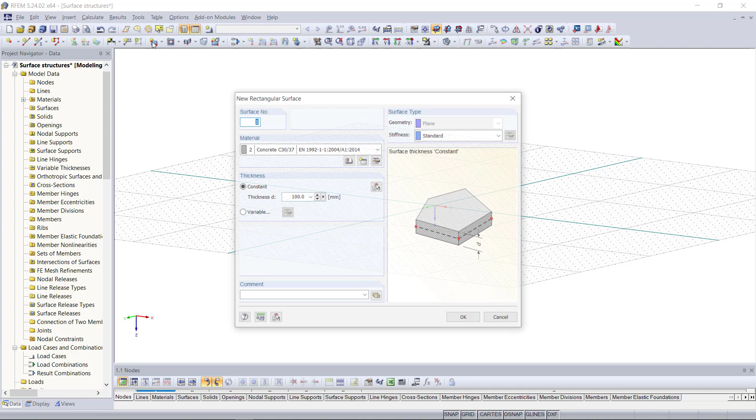For that, we can find in the toolbar a symbol called new rectangular surface. By clicking on it, a new dialog will appear where we can define the properties like material, the thickness, and the surface type. As material, we will choose, for instance, concrete C30/37 based on a European standard, and the thickness will be, let's say, 300 millimeters.

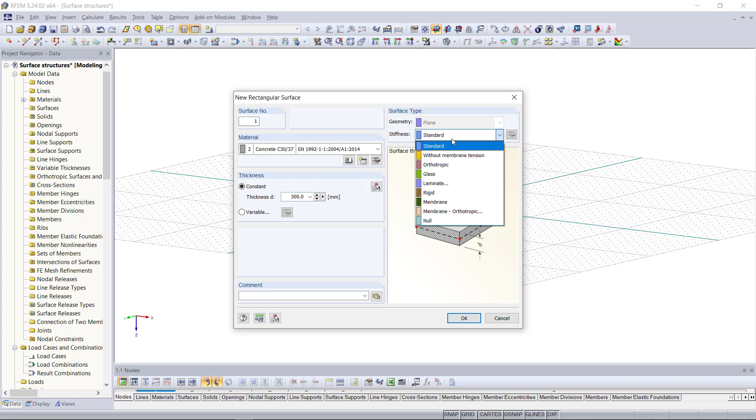And then under surface type, we can choose some additional options regarding the stiffness and with that structural behavior of the surface. We can choose, for instance, without membrane tension, or we can choose a rigid one. But for our example, we don't need that, so we will stay with the standard type.

With clicking OK, we can select 2 points in the graphical area to create the surface. Up here, we can change the view to the top view. This makes it just a little bit easier to snap those points. So the first node will be at 0 and 0 and the second one at 10 and 10.

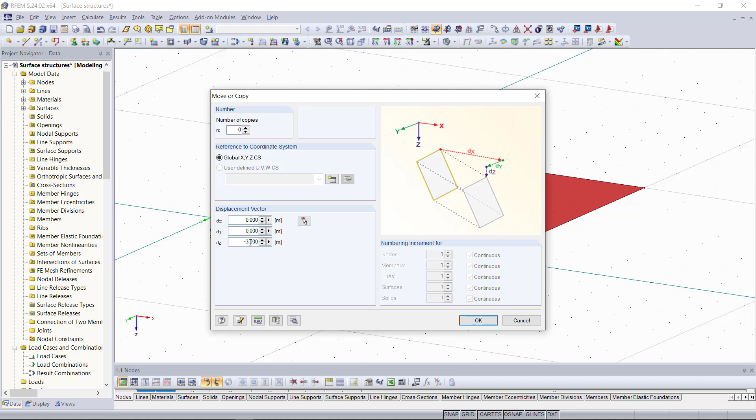Then we will move the surface with an offset of 3 meters along the z-axis. For that, we use again the copy and move command, which we can find in the toolbar, or we can also find that with right click on the surface. Since we don't want to copy this one, we can keep the number of copies as 0. And in order to move it, we just type in the z direction -3 and then click OK.

Now that we have our slab, we will create 4 more surfaces, which will be our walls. And for that, we click again on new rectangular surface. In the new dialog, we can keep the previous settings except the thickness. Our walls will have a thickness of 200 millimeters.

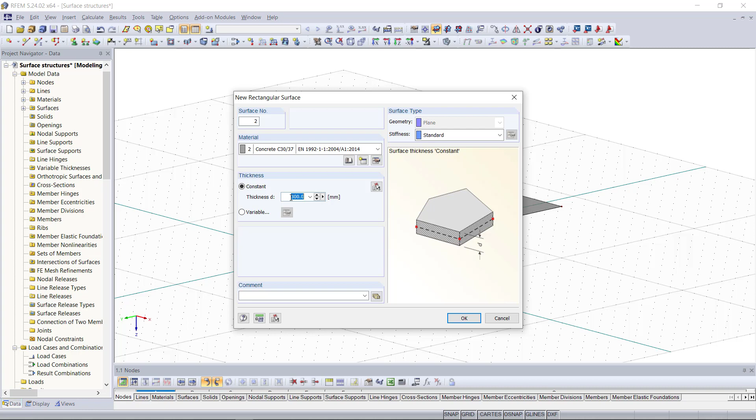And then we can graphically insert them along the edges of the slab. A great help during modeling these surfaces is if we change up here the plane, we can easily snap those points and create those surfaces.

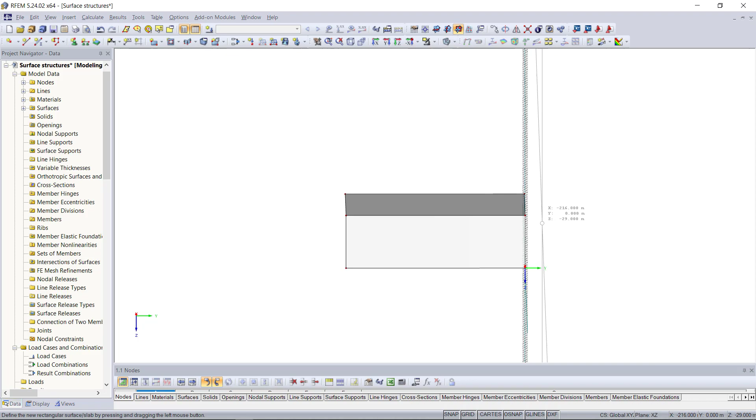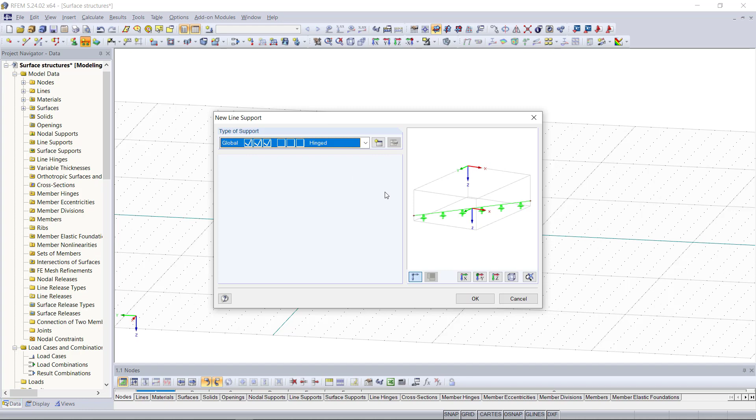Now that we have our structure, we need also some supports. And for surfaces like walls, in order to create the supports along their edges or along the bottom lines, we can find up here the symbol called line support. And we will choose hinged ones, and then with clicking OK, we can assign these very quickly to those lines.

You might notice that there is no thickness displayed for the surfaces that we've just created, although we've entered a thickness back in the surface dialog. So this is just a view setting. We can get it displayed if we go to the display menu and then choose rendering. Under model, here we can choose filled inclusive thickness. Just as a hint for you, and as we can see it now in the graphical area, the thickness is rendered on these surfaces.

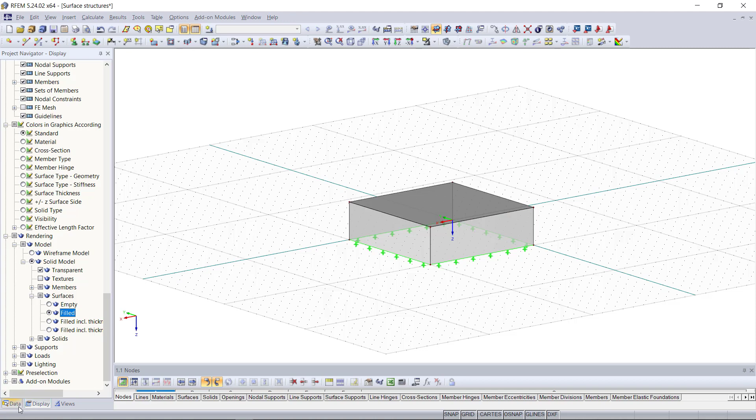So we are almost finished with our structure. Just for more stability, I'd like to create a column in the middle of the slab. For that, we will divide it into 4 identical surfaces so that we can get the middle node for the column. And then later, we can also apply a load on each of these surfaces within 4 different load cases.

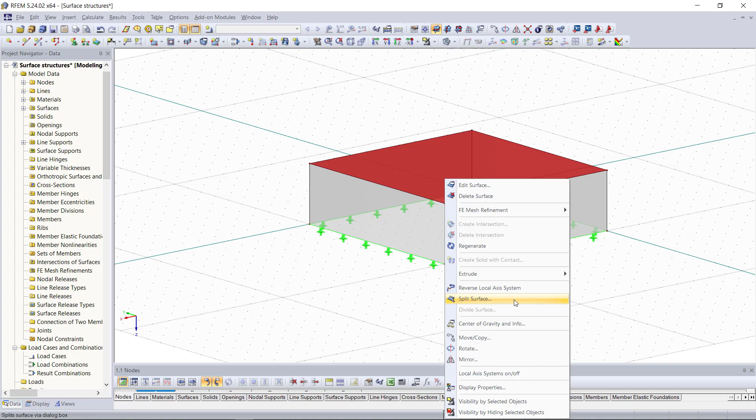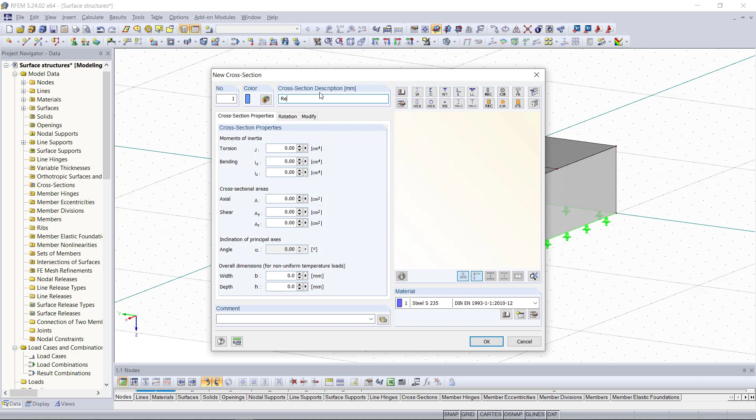And now we can create the column at this middle node of these surfaces. So we will select new single member up here, and then as cross section, we can enter a rectangle with a height and a width of 300 and concrete as material.

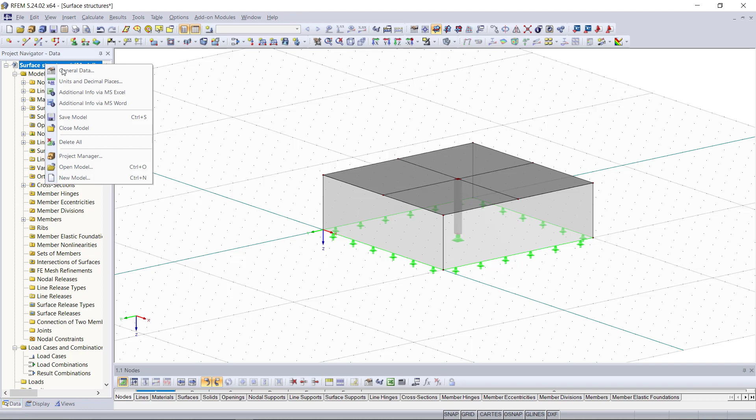And then we will add also a nodal support to this column. Now that we have our structure complete, we will move on to the load cases and loads. Before we get started with defining any load case, we will first go back to the general data. The dialog for that we can open up with right click and then select general data.

What I want to do here is to activate the option called create combinations automatically. So first we can determine the standard type, for example the European one, and the German national annex for it, and then we can activate this option here. This will allow us that the load combinations of the load cases that we will define later are getting generated automatically, since we have this time a couple of more load cases than usual. And with OK, we can close this dialog and start defining the load cases.

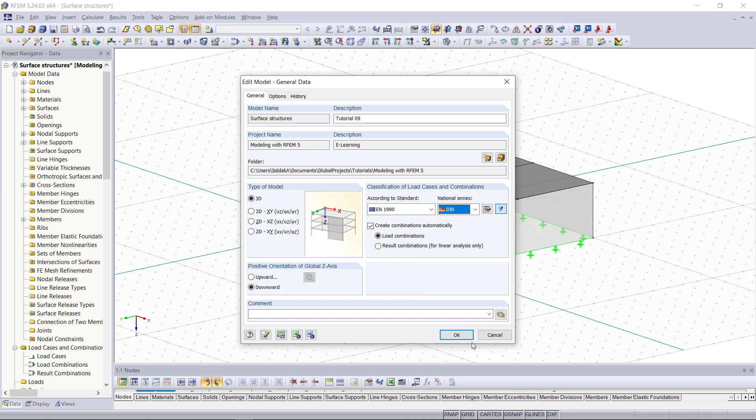So the first load case is, as usual, the self-weight, and then we will create 4 more load cases. Assuming an office building above our slab, we will choose this action category here, and let's say we call this one surface load 1. Then we can copy this one 3 more times and rename them to surface load 2, 3, and 4. And then we can assign a surface load for each load case with changing the surfaces.

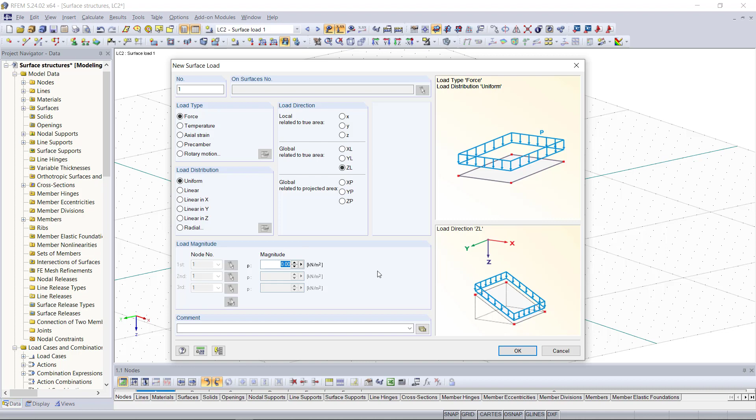So we will choose the right load case up here and then click on this button called new surface load. Similar to the dialog for a distributed load, we can keep load type as force. The direction will be global z direction. As a load parameter or magnitude, we will enter here 2.5. And then we can apply it to each surface.

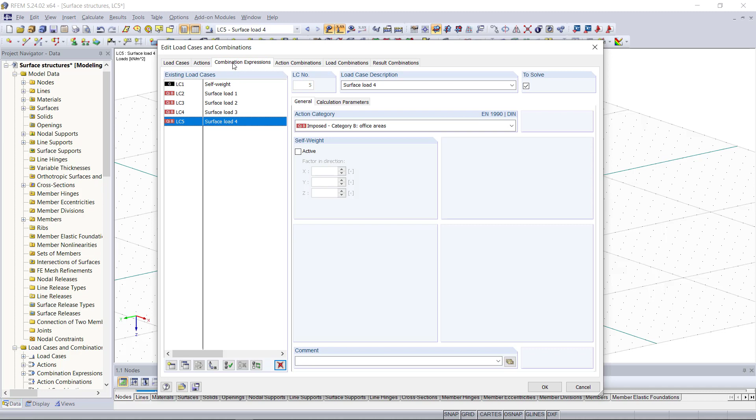With the loads applied, we go once again to the load case settings, and under combination expressions, we can set all possible settings for creating combinations automatically. There is, for example, the option called reducing number of load cases, which can be very useful if we have a couple of more load cases than we do right now. It allows us that the number of combinations is getting reduced to the essential. Otherwise, RFEM would create every possible combination, even if it's not decisive. In our case, since we only have 5 load cases, we don't need to activate this option here.

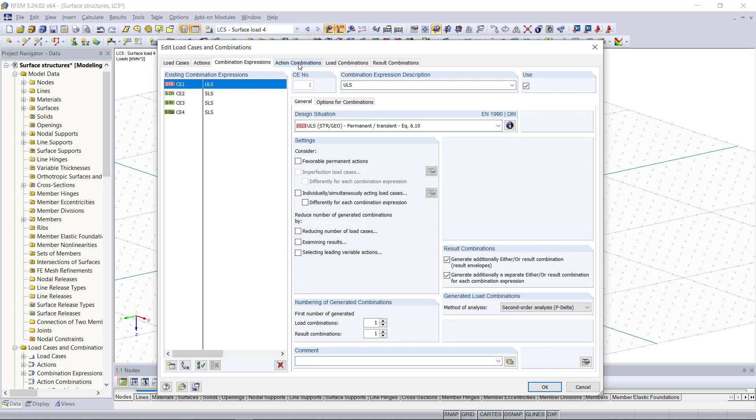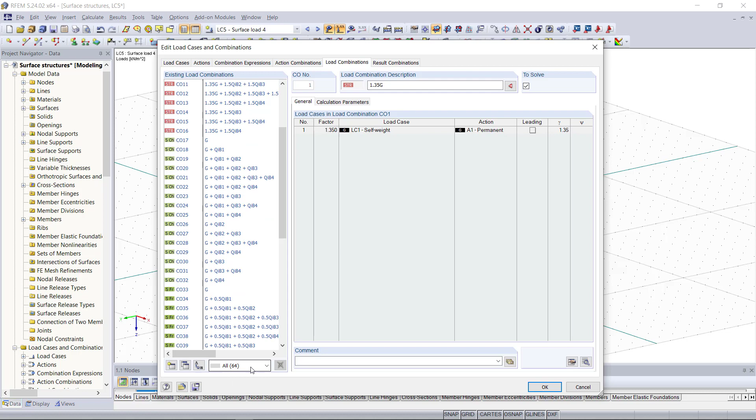Then in the next tab called action combinations, we can define and edit the action combinations according to the standard or standard type, including the serviceability limit state and the ultimate limit state. Next, under load combinations, we can see the load combinations, which are generated automatically, and if necessary we can also edit them. Right now, for our example, we have in total 64 different combinations, as we can see here. And then the last tab is called result combinations. A result combination superimposes the results of load cases, load combinations, or result combinations according to the preset combination expressions.

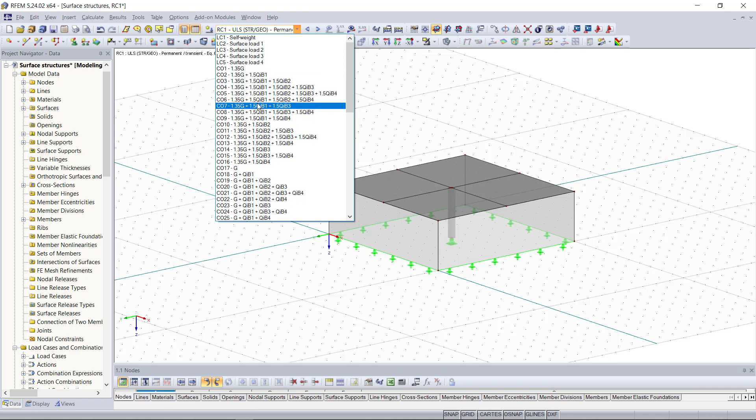If we click OK, we can have a look at all combinations up here and then check if the load cases were combined as we like. And then we can run the calculation for our system. And since we have a couple of more load cases and combinations, this will take just a little bit longer than usual. Now we can display the internal forces and deformations for each combination which we choose up here.

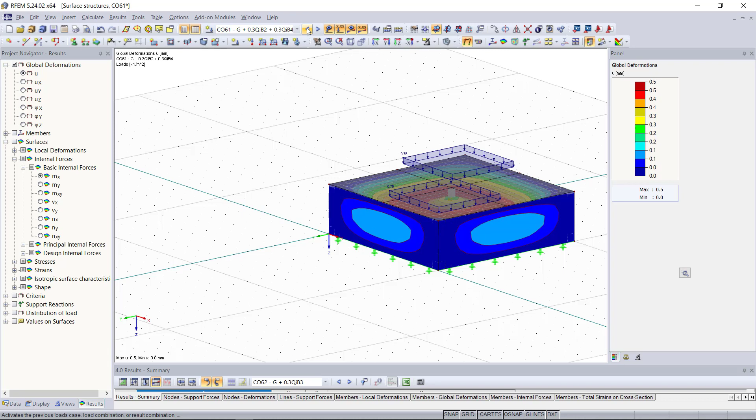So this was our tutorial about modeling and calculating surface structures, and the next video will be about modeling 3D structures.